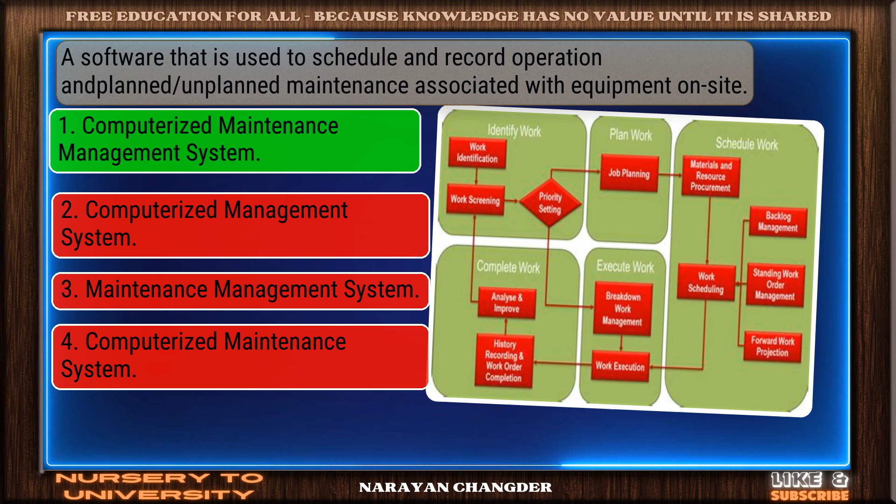A software that is used to schedule and record operation and planned or unplanned maintenance associated with equipment on site. Well reasoned. Computerized maintenance management system is the correct choice.

The following is a business process in companies that functions to develop business strategies and identify opportunities. Excellent. Business development is a brilliant choice.

The following is a business process in a company that functions to manage buildings and hand over property to customers. Bravo! Estate management is the answer.

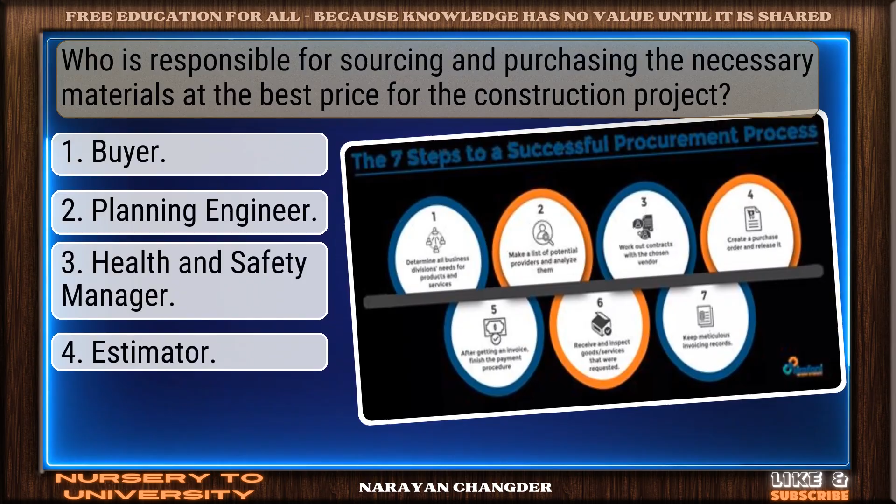Who is responsible for sourcing and purchasing the necessary materials at the best price for the construction project? Well picked. Buyer is the correct answer.

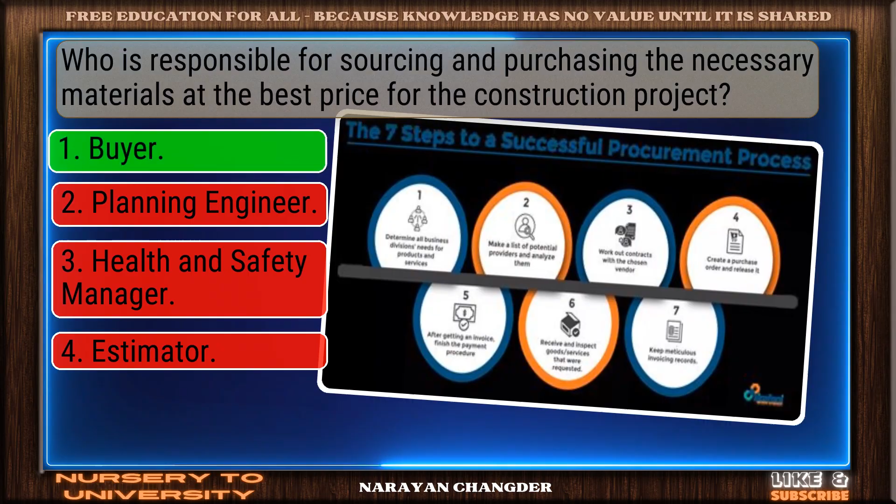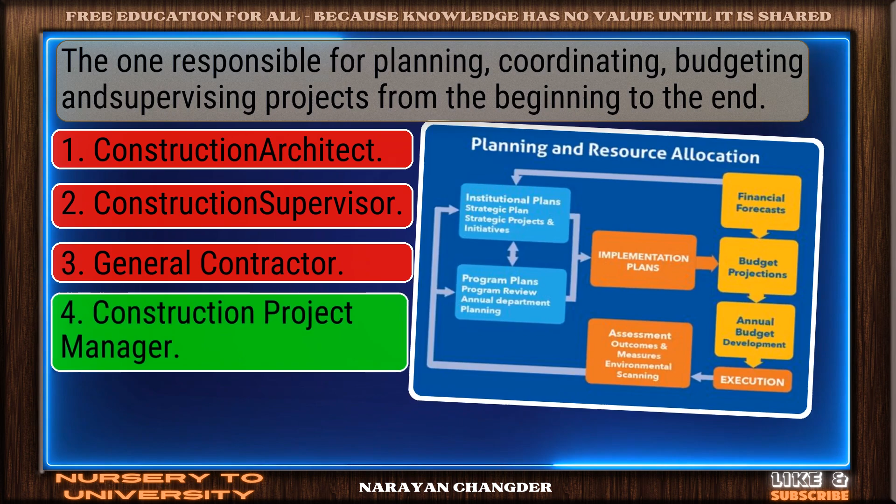The one responsible for planning, coordinating, budgeting and supervising projects from the beginning to the end. Perfect. Construction project manager is the correct choice.

Selecting and monitoring project procurement costs, calculating the overall cost of the project, is the task of... You chose quantity surveyor, and it is correct.

Which is the most important financial document to be maintained while managing a project as a project manager? Nicely done. Balance sheet is a solid answer.

The process of checking by the contractor before handing over the building to the construction team is called... On track. Pre-checklist is the correct answer.

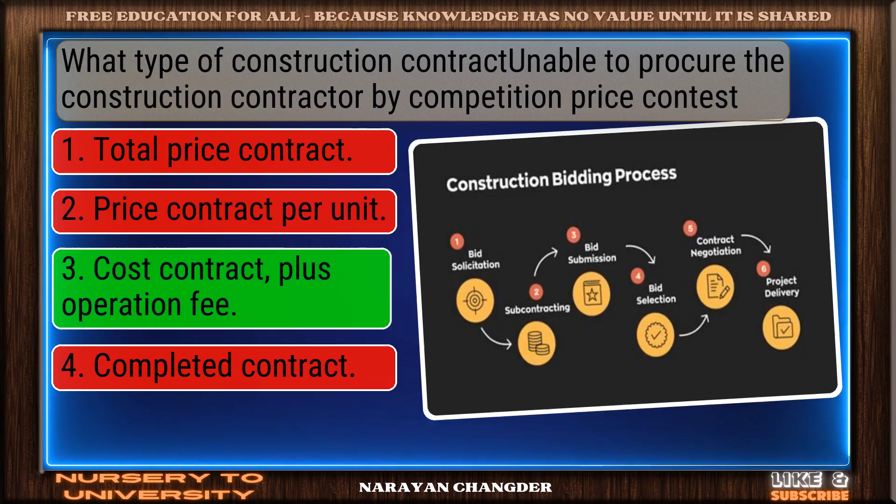What type of construction contract is unable to procure the construction contractor by competition price contest? Right choice. Cost plus contract with operation fee is the best answer.

Which individual is responsible for identifying, securing and managing construction projects and contracts? Excellent choice. Contracts manager is the right answer.

What is the second most important stage after initiation of a project in project management consultancy? Good job. Your answer, planning, works well here.

The process of handing over buildings, such as houses, from the construction team to estate management is called... Nice selection. Handover is the correct and valid answer.

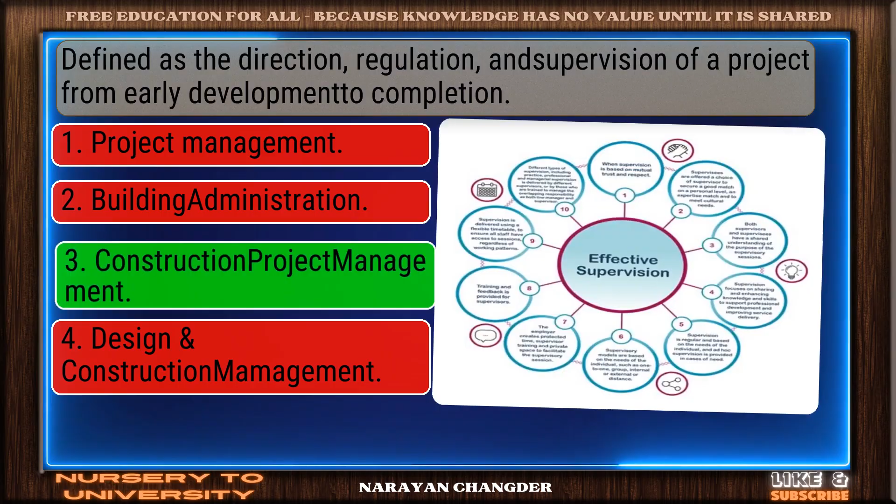Defined as the direction, regulation, and supervision of a project from early development to completion. Great job. Construction project management is the accurate answer.

Which one is similar to the construction cycle? Well done. Planning, executing, monitoring, closeout is the right choice.

Determining the objectives of the construction project should meet the needs of any group of people. Correct response. Project owner is the most accurate answer.

The manager's position in a construction project with a more defined, specific working role. Smart move. Construction manager is an accurate answer.

The process of maintaining a project's inventory, equipment, tools, manpower, and budget resources. Strong choice. Maintenance management is the right answer.

In which step are the highest resources and the highest complications of the construction project? You're right. Implementation is the correct answer.

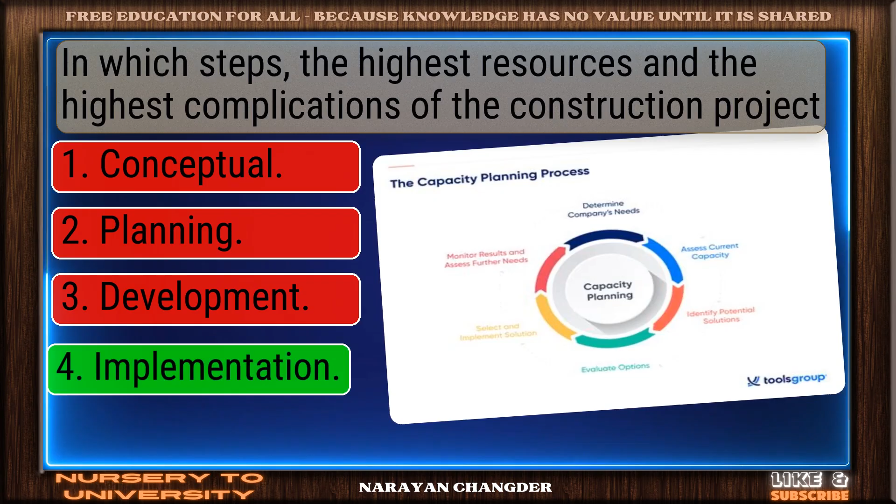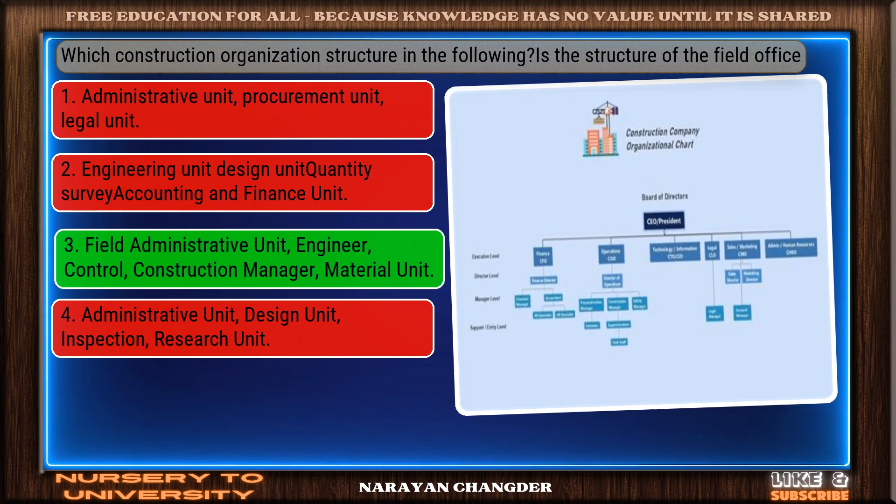Which construction organization structure in the following is the structure of the field office? Good thinking. Field administrative unit, engineer control, construction manager, material unit is the right answer.

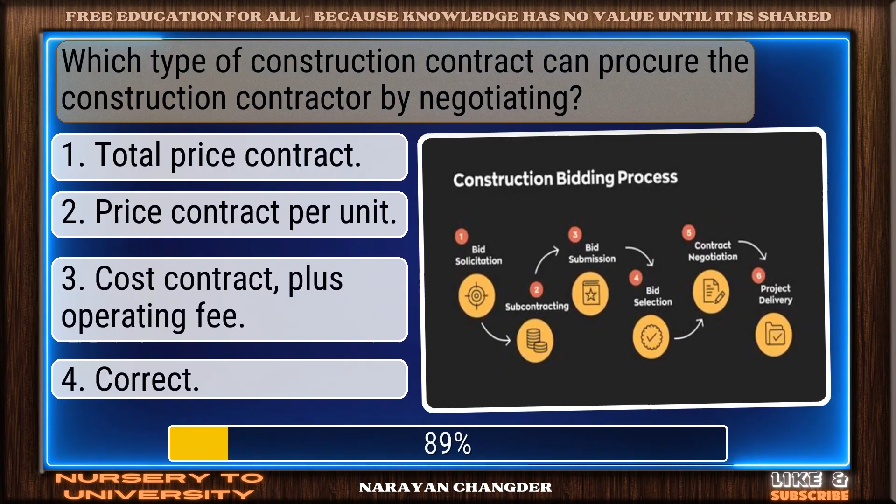Which type of construction contract can procure the construction contractor by negotiating? Smart pick. Correct is the correct choice.

In general, the construction contract between project owners and contractors is organized as... Exactly. Employment contract makes sense and it is the right choice.

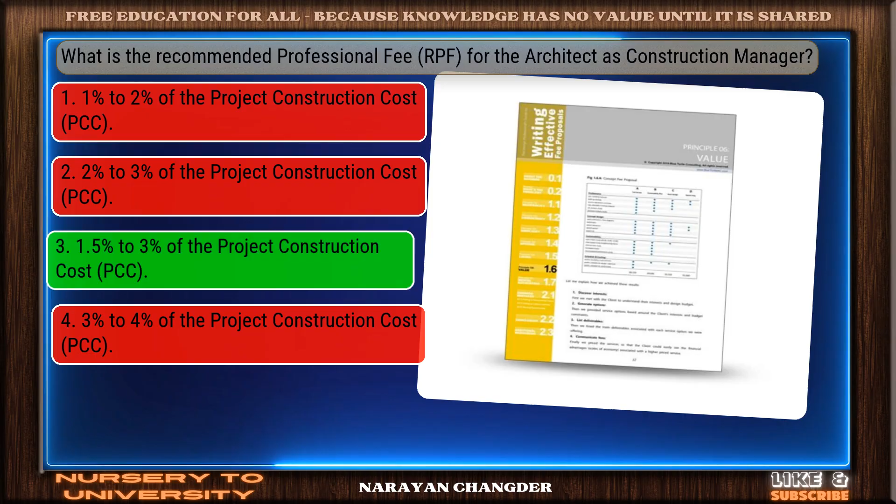What is the recommended professional fee for the architect as construction manager? Correct. 1.5% to 3% of the project construction cost is the right answer.

Which type of construction contract has the same characteristics as the turnkey contract? You got it. Your choice, design build, is right.

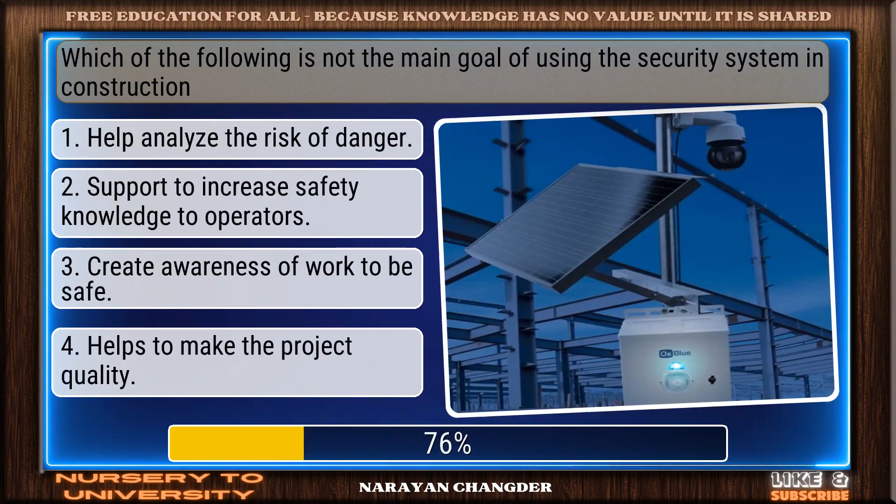Which of the following is not the main goal of using the security system in construction? Nice work. You chose 'helps to make the project quality,' and it is correct.

What is the method of compensation for the construction manager according to the text? Sharp thinking. Multiple methods of compensation is the right choice.

Which type of construction project is perfect to develop by design and build? Good job. Your answer, the construction of a complex oil refinery project, works well here.

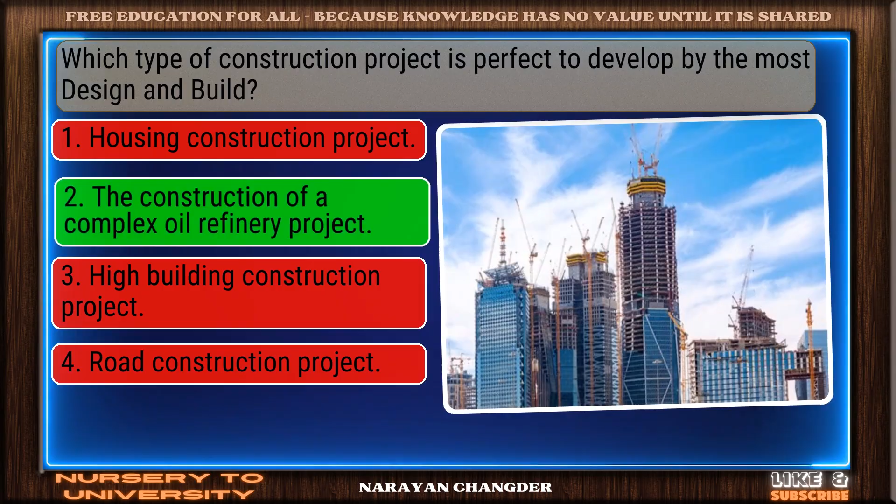What is the oldest and simplest form of organization adopted in construction projects? Good thinking. Line organization is the right answer.

What phase is one of the most important aspects of construction project management? Nice selection. Initiation phase is the correct and valid answer.

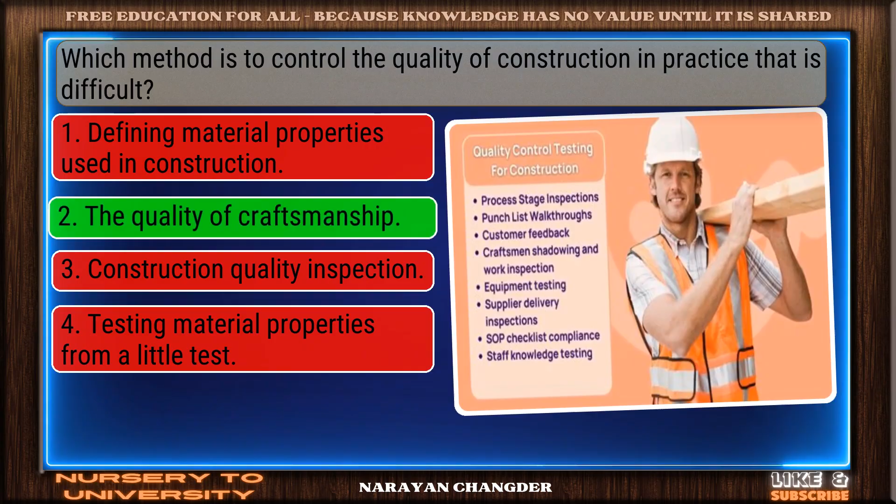Which method to control the quality of construction is difficult to apply in practice? Great job. The quality of craftsmanship is the accurate answer.

One of the following is not a typical function of a construction management process. Right choice. Advertising is the best answer.

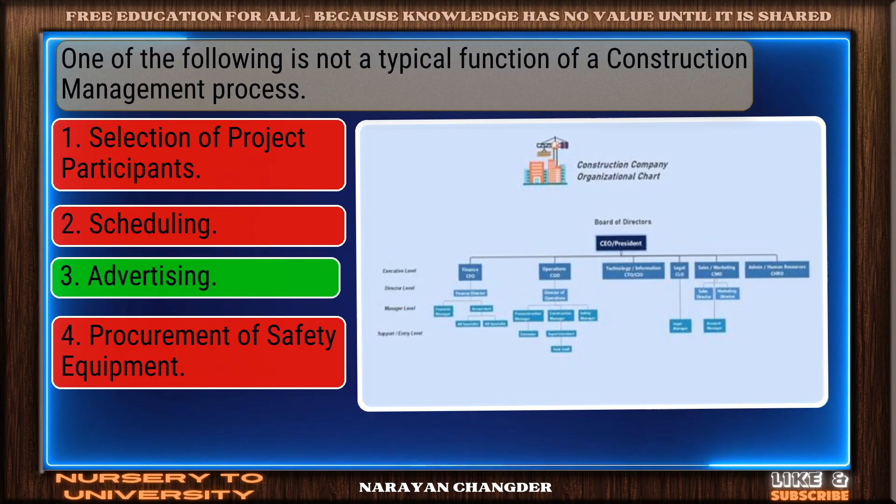Communication will happen the most in which phase of the construction project?

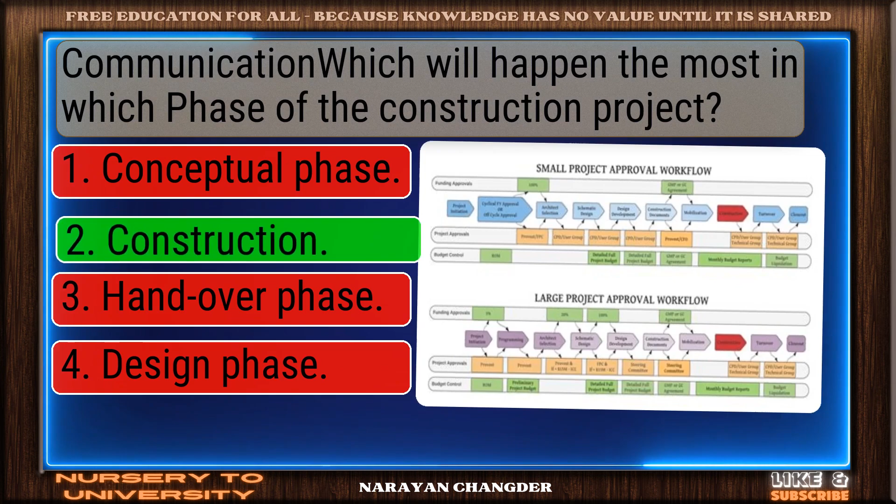Solid response, construction is a valid choice. What is the limitation of authority for the architect as the construction manager?

Nicely done, both A and B is a solid answer. What insurances are required during the construction stage of a building project?

Great thinking, fire, public liability, and workman compensation is the right choice. Safety officials at the construction unit involves any government agencies.

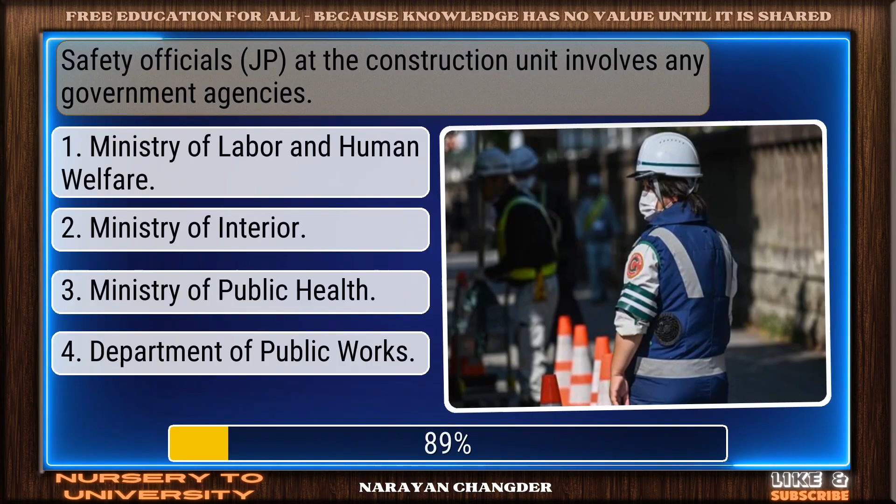Perfect, Ministry of Interior is the correct choice. The column, beam, and ring beam work is part of the construction process, namely.

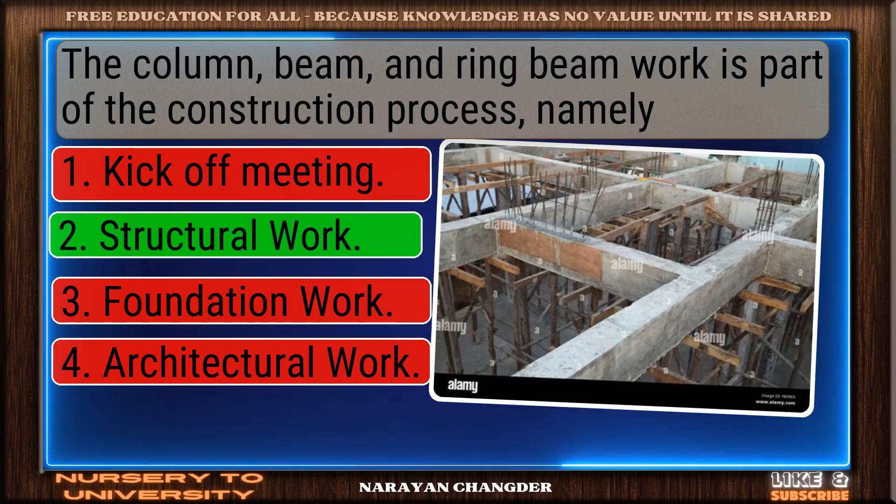Nice work, you chose structural work and it is correct. Which item is not dividing the construction according to the nature of the work?

You got it, your choice low-quality construction work is right. How should personal prevention equipment for construction workers be qualified?

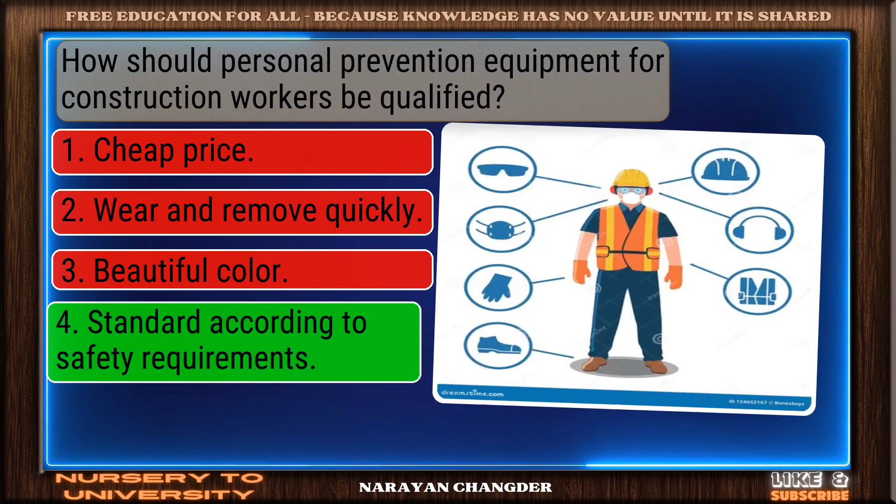You're right, standard according to safety requirements is the correct answer. The following documents are not considered part of the contractor's contract.

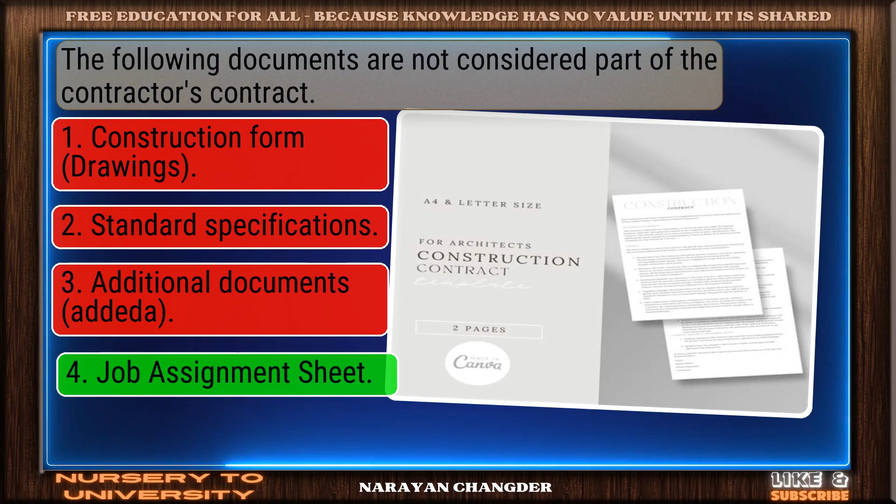Sharp thinking, job assignment sheet is the right choice. The phased construction model is suitable in any case the most.

Valid point, urgent construction project is true. Which of the following is guidelines for quality management and approach?

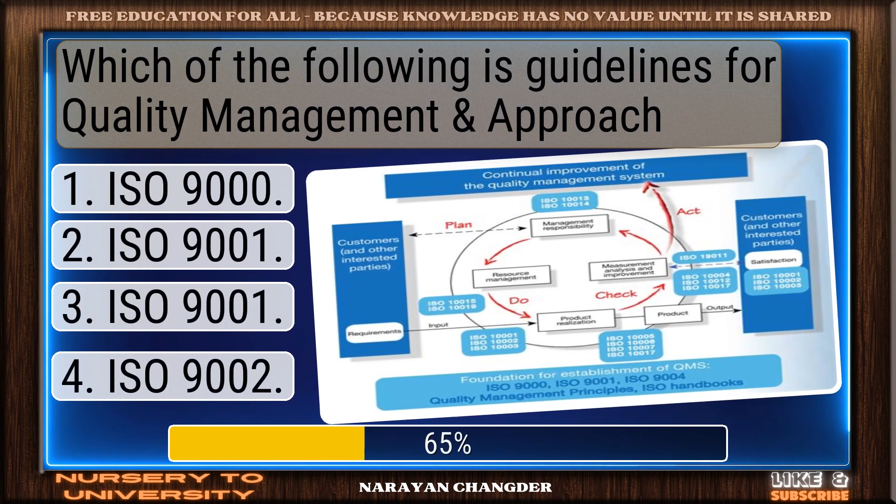Excellent, ISO 9000 is a brilliant choice. One of the following is not a part category of construction management.

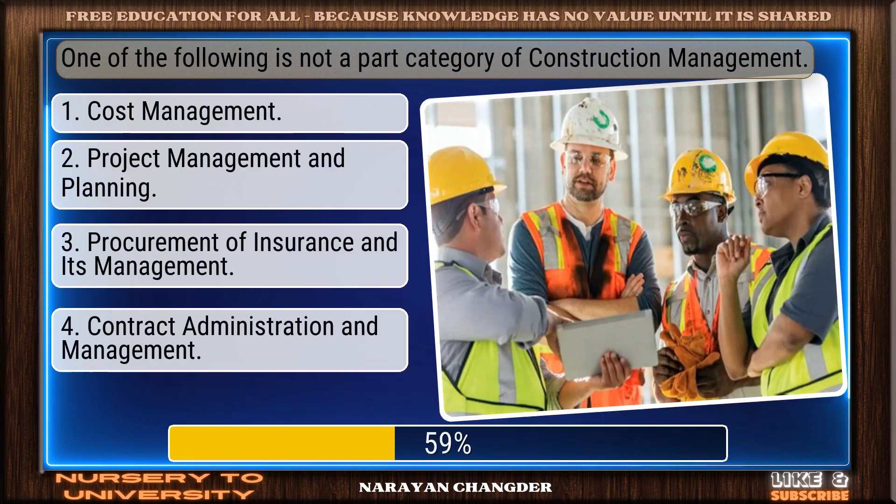Bravo, procurement of insurance and its management is the answer. Who can serve as the construction manager according to the text?

On track, the architect is the correct answer. Installation of Hebel and plastering is part of the construction work.

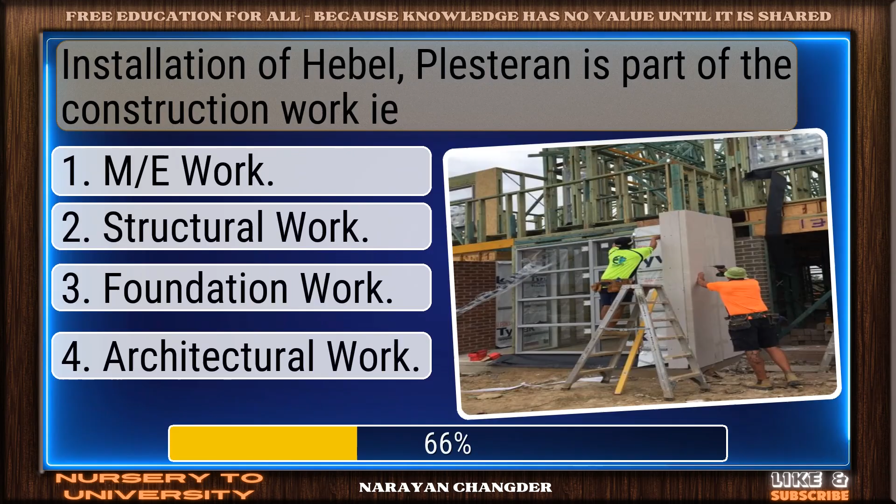Strong choice, architectural work is the right answer. What is the main focus of Unit 38?

Personal professional development. Well picked, personal learning needs is the correct answer.

This is done if the restriction is on the availability of resources. Smart pick, resource leveling is the correct choice.

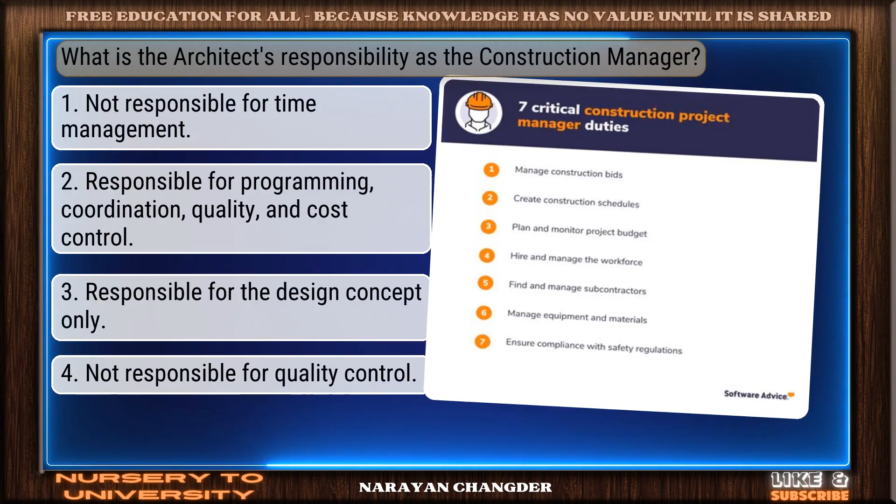What is the architect's responsibility as the construction manager? Right again, responsible for programming, coordination, quality, and cost control is a valid answer.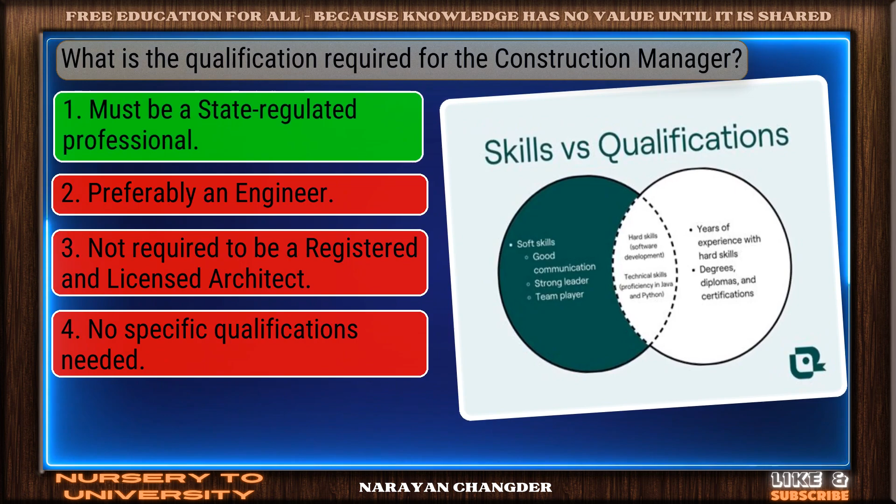What is the qualification required for the construction manager? Exactly, must be a state-regulated professional makes sense, and it is the right choice.

Soil excavation work is part of the construction process, namely. Clear logic, your choice foundation work is sound and 100% true.

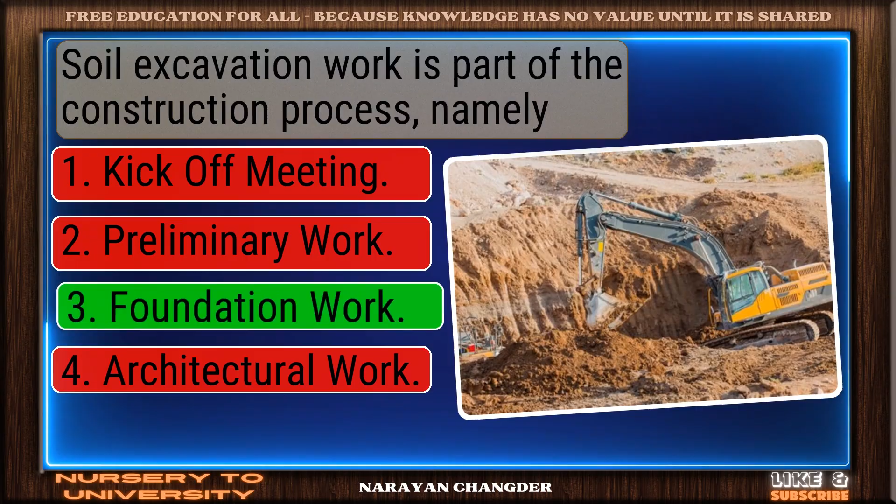Which is the management of inappropriate construction projects? You chose have a complex work plan, and it is correct.

RIBA specimen checklists and forms can be obtained from. Correct response, RIBA job book and RIBA website is the most accurate answer.

Who has the final decision to determine the end of the project? Well done, project owner is the right choice.

Who deals with construction workers, equipment, and materials? Smart move, construction manager is an accurate answer.

What is not a part of the 5M's theory in construction management? Correct, mitigation is the right answer.

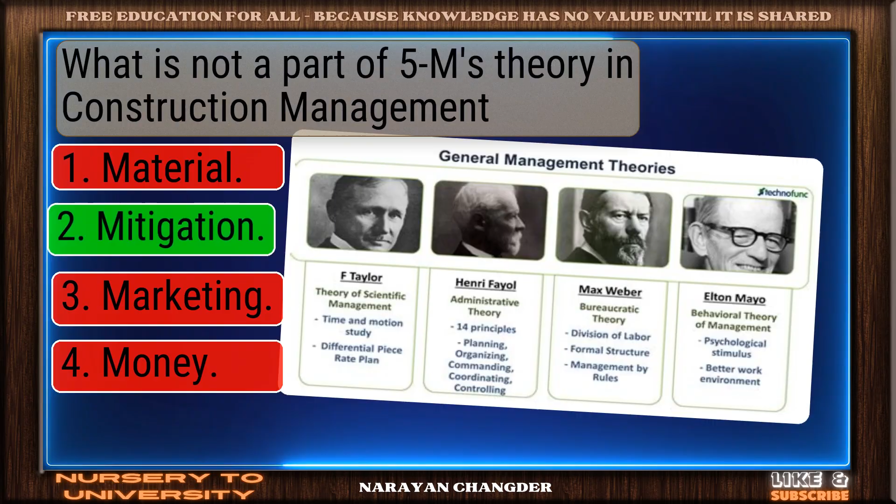Mention the correct sequence of project cycle stages. Valid point, feasibility and design, pre-construction, procurement and construction, owner occupancy is true.

Which is the law on safety in construction not yet covered? Excellent, concrete work is a brilliant choice.

Which is not the main function of the construction manager? Nice work, you decided to select the designer, and it is correct.

This is the final phase of the project management process. Bravo, project closing phase is the answer.

Which side involves the inspection of construction quality? On track, designer is the correct answer.

The objective of the ISO 9000 family of quality management is? Solid response, customer satisfaction is a valid choice.

Who is the inspection of the quality of the construction? Good thinking, correct is the right answer.

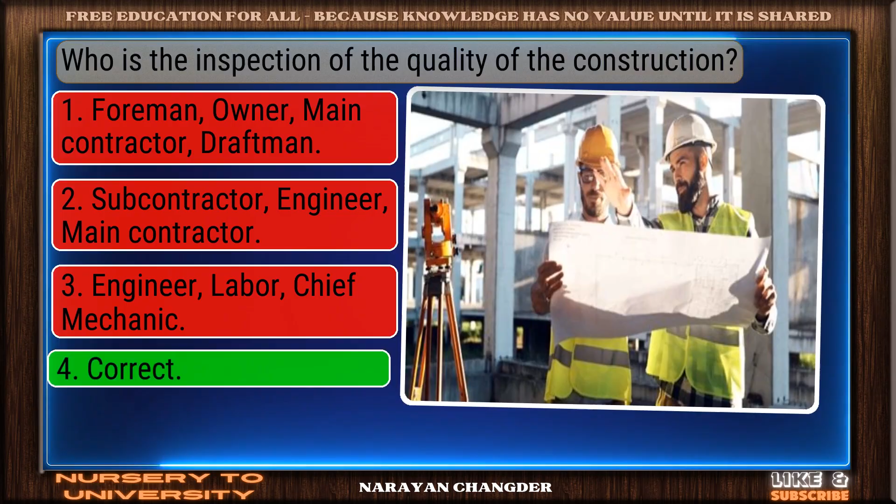Which one is not the component of construction planning? Correct, execution is the right answer.

How is the construction industry like this year? Great job, grow is the accurate answer.

For most of the occupational accidents, the root cause is? Right again, management is a valid answer.

What are the triple constraints of project management? Excellent choice, time, cost, and quality is the right answer.

Which is not a key feature of construction management? Well done, civil disputes of families is the right choice.

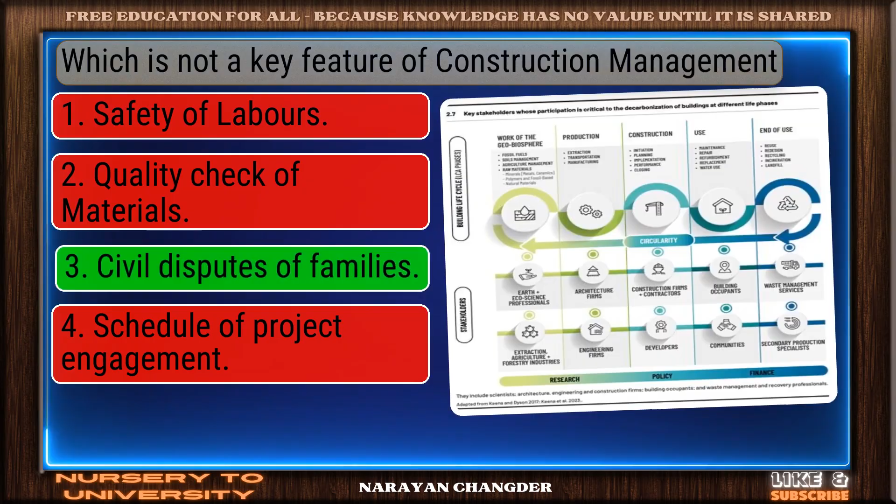Which types of contracts not used in construction? Perfect, express and implied contracts is the correct choice.

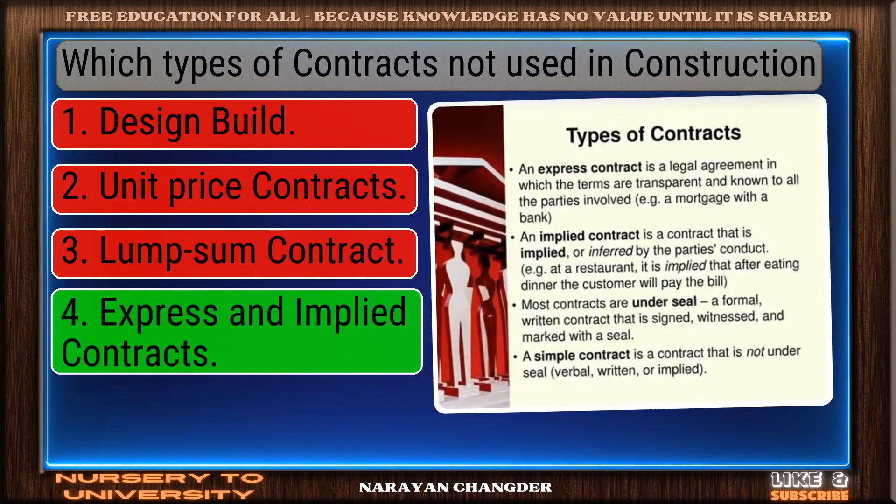Which is related to quality management? Correct response, ISO is the most accurate answer.

Power stations are generally treated as? You got it, your choice, industrial construction, is right.

This isn't a construction material. Well picked, shovel is the correct answer.

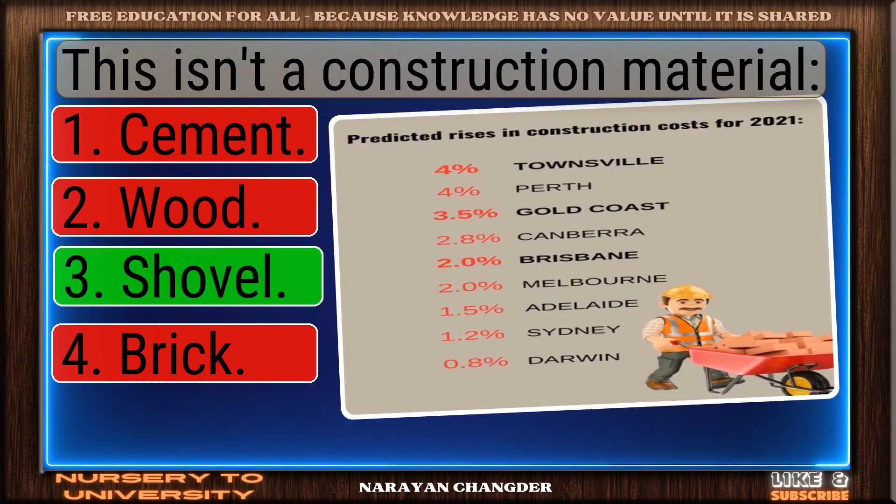Who is responsible for the safety of construction? Exactly, everyone in the construction agency makes sense and it is the right choice.